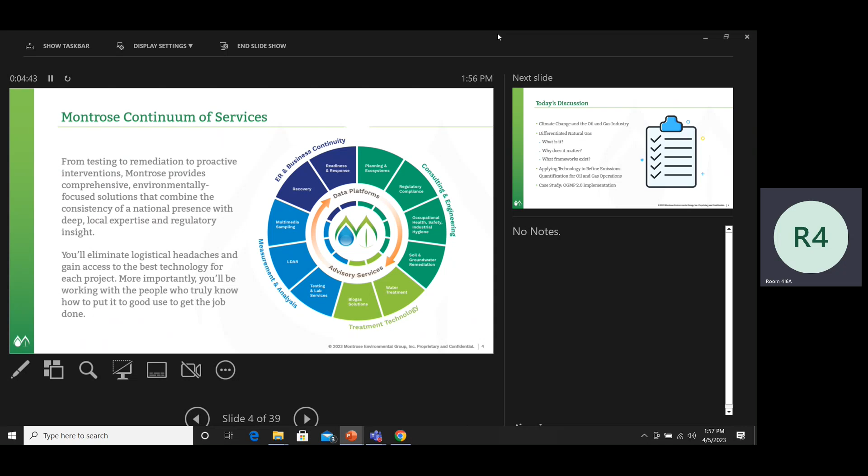So here's a rundown of what we're going to talk about today. We're going to start by talking briefly about climate change and the oil and gas industry and our place in that space. Moving on, we're going to talk about differentiated natural gas, what it is, why it matters, and how you can claim that you have it. Next, we're going to talk about technologies you can leverage to improve the accuracy of emissions quantifications from oil and gas operations. And finally, I'm going to wrap up with a case study about a client we've been working with extensively on their OGMP 2.0 implementation and kickoff and their measurement campaigns.

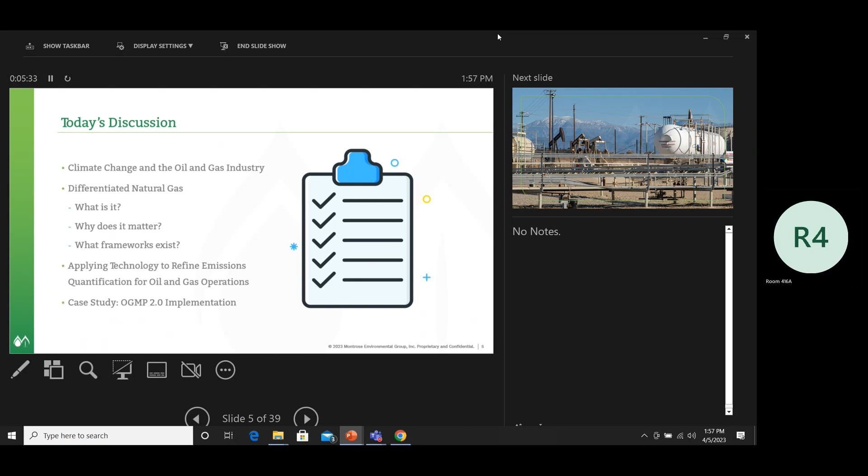Sorry. So setting the stage, climate change in the oil and gas industry. Methane gets a lot of attention. According to recent estimates, we can't cap out at a 1.5 degree Celsius temperature increase without a very significant decline in methane emissions, current estimates around 37%. Methane has a high global warming potential, 25 to 28-ish times higher than carbon dioxide. Because of that, it's thought that methane is responsible for about 30% of observed global warming to date.

Methane is also the primary component of natural gas. Therefore, if you look at a breakdown of reported methane emissions in 2021, the energy sector is a very large percentage, about 40. What's interesting is because methane is natural gas, it is the product, it's thought that you can avoid about 70% of current oil and gas methane emissions with technology that exists today. And because you're recovering product, you could probably avoid about 45% of that number at no additional cost to you.

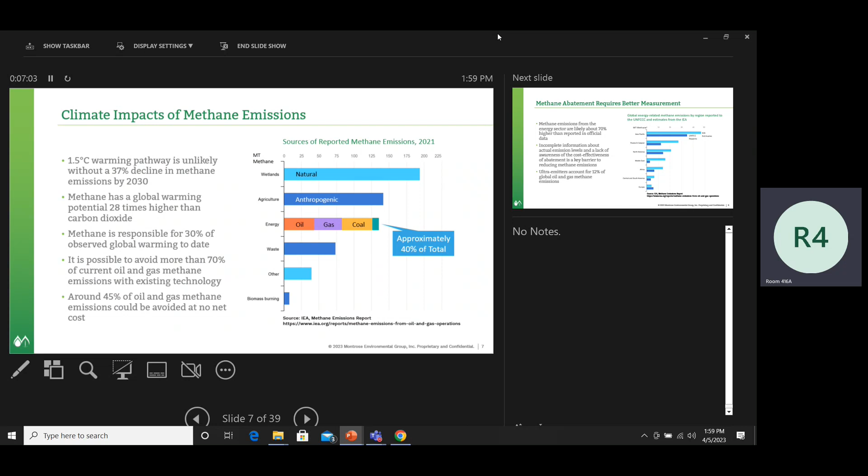Also interesting about methane emissions from the oil and gas industry is that, according to some estimates, actual emissions may be up to 70% higher than what's actually been reported. That's from information from flyovers and independent studies. What drives that? Incomplete information. If you don't have measurements, if you don't have real data, how do you know what you're emitting? And there's also a statement that ultra emitters are about 12% of the methane puzzle.

Okay, so all that together, what are the takeaways? One, methane emissions from oil and gas are under extreme scrutiny. We know that, we hear that, we see that every day. Methane is natural gas, and the energy sector results in methane emissions. Two, methane emissions reported from the oil and gas industry are incorrect. The status quo depended on emission factors. We know now that those emission factors are incorrect.

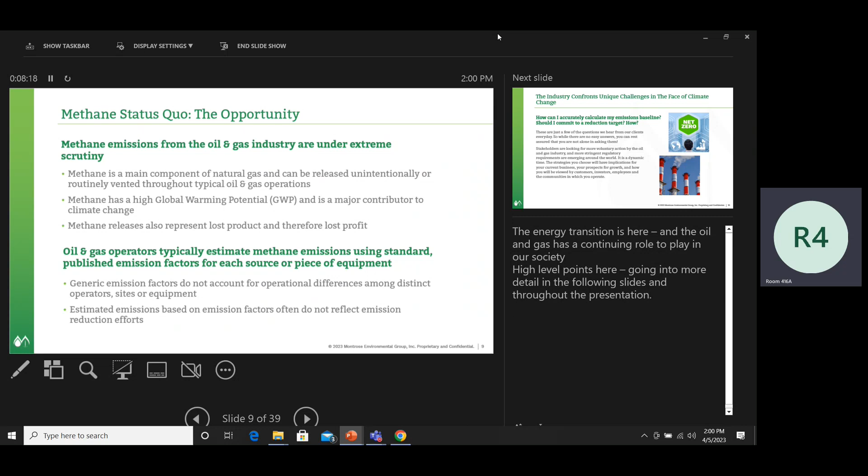So what do we do? We hear questions every day from people saying, okay, I hear this, I know this, but now what? How do I accurately estimate the emissions from my processes? But then what do I do next? I know what I'm emitting, and there's a lot of options. How do I know what's best for me? These are, like I said, questions that we hear every day. They're real, they're hard, but they're also interesting. They offer us incredible opportunity to learn more, to get creative, to apply technology, and to try to make a change.

That brings me to differentiated natural gas. So what is differentiated? It's actually pretty simple in terms of a definition. It's three things. The fossil fuel-based gas, natural gas. It is from production where methane emissions have been quantified, and there's been an effort to mitigate or reduce those levels. And then importantly, the third part of the definition of differentiated natural gas is that these estimates and this mitigation strategy have gone through a third party group. Those together make differentiated natural gas.

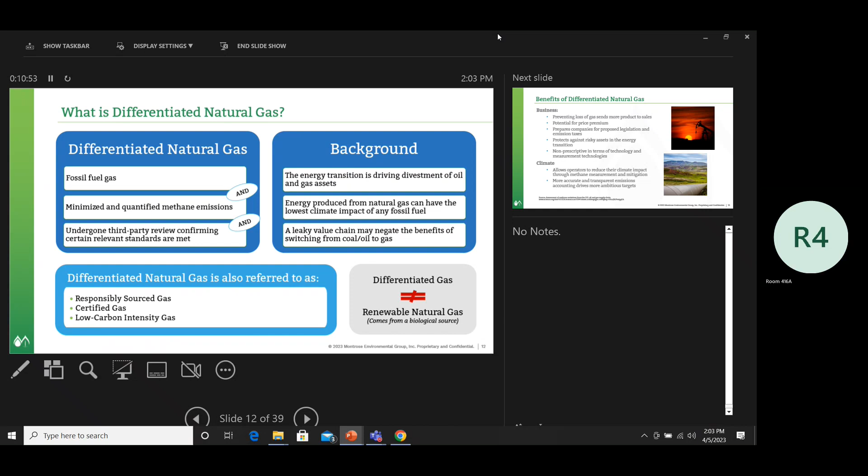There are benefits to pursuing differentiated natural gas. I separated these into two buckets because often people will gravitate towards one reason or the other, and they're both completely valid. The first are the business reasons. Preventing loss of methane to atmosphere keeps more product in your pipe. You're selling more, you're increasing your profit, it makes financial sense. There's also a potential for a price premium if you've got differentiated natural gas. If consumers are interested in that label and knowing that they're doing some part to reduce climate impact, they're often willing to pay a little bit more for it.

It may also prepare companies for proposed legislation and emission taxes that could be coming down the pipe. It protects against risky assets in the energy transition. We're seeing more and more focus from an investment perspective on ESG and carbon footprint, and if you understand where your emissions are, you can protect yourself financially. I also put in this business bucket that there are a lot of options within the differentiated natural gas program. When you don't have something very prescriptive, you have more power to choose what fits for you and your operations. You're not necessarily having to have huge impacts to your business.

From a climate perspective, differentiated natural gas programs allow operators to reduce their climate impacts through methane measurement and mitigation. And because they're very data driven, you're ending up with more transparent and accurate accounting, which allows you to prioritize your projects so that you're making the biggest real life impact.

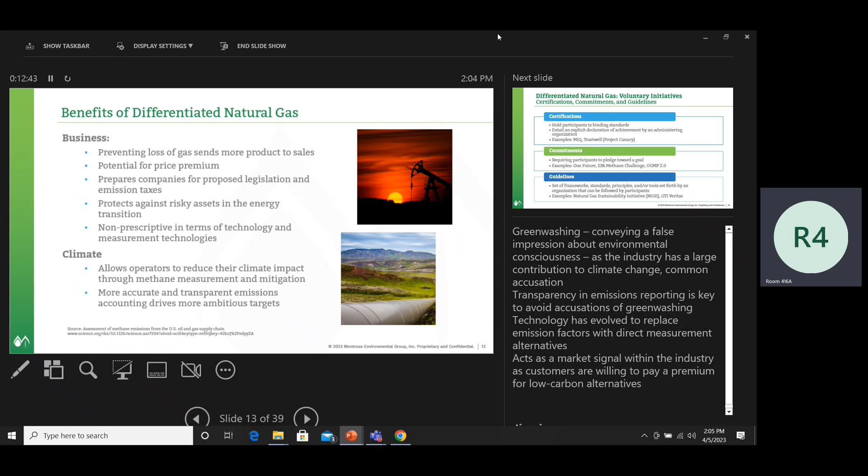The differentiated natural gas market in the United States especially is voluntary. It's voluntary, but it's gaining a lot of popularity. Because it's voluntary, not regulatory driven, we're seeing a lot of options in that space right now, right? Lots of people are coming forth with ideas on how to address this, how to change this. And there's a terminology that's important to understand.

The frameworks for differentiated natural gas really fall into three buckets or categories. The first are certifications. These are the most formal programs. They're going to hold participants to very binding prescriptive standards, and they require an explicit declaration of achievement by an administrating organization. These are going to be generally considered your more rigorous, your more difficult certifications to attain. Things like MIQ.

Just an aside, I did not list every single framework on this slide that exists. There's about 1 million, so I just called out a few of the big names here.

Commitments are a little bit more forward-looking in that participants are pledging to a goal that they're trying to achieve, and they are committing to steps to try to achieve that goal. But often getting any sort of achievement or designation under a commitment doesn't require that you actually meet the goal. Pledging to try. These are things like ONE Future, the EPA Methane Challenge, and OGMP 2.0.

All right. So most of those frameworks are going to require a first step of knowing where you are, right? I'm sure if you've gone to any talks today, you've heard some variation on the theme of you can't mitigate what you don't measure. I'm going to say the same thing today. It's important to know where you're starting to make goals for where you're ending up. And so I want to talk to you about how you can apply technology to refine your emission quantifications within oil and gas. Accurate measurements are the first step towards putting together that initial inventory. Once you have that initial inventory, you're going to know where your biggest potential for reductions and improvement might exist.

All right, so why should we measure? If you look back at historical oil and gas reporting, what you see looking at EPA mandatory reporting rule subpart W, there's a lot of relying on generic emission factors, an scf per minute per unit emission factor for something. We're automatically assuming that it's going to operate continuously or at full load for 8,760 hours per year. And you end up at a number that is maybe conservative, maybe not, maybe underestimating, maybe not. But you get a number, but it's not accurate. It's not tied to anything about your operation.

If instead you choose to explore both proven and emerging technologies, you can deploy measurement campaigns at your sites, collect data from your equipment based on your processes, and develop a database of emission factors that you can then leverage and apply across your organization to end up at an emissions estimate that is transparent. You can publish your methodologies for your measurements, for your sampling, for your assumptions, and it should also be more accurate because it's based on your operations. And so I argue firmly that this is where we want to end up. That if you're starting a sustainability journey, if you're anywhere on this path, you need to measure what you're doing to figure out where you're going.

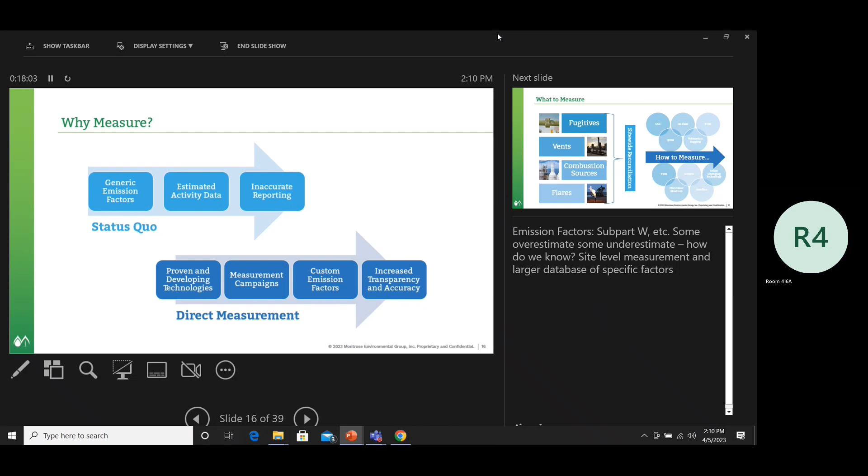Within the oil and gas world, we basically see 4 types of emission sources where folks are focusing on bottom-up or emission source specific measurement. Those categories are fugitives, so those are unintentional leaks from things like your piping components, your valves, your flanges, your connectors, stuff like that. You see emissions from vents, things like your glycol dehydrators; your pneumatic devices also qualify as vents. Methane slip emissions from your combustion sources, like your compressors or your turbines, your engines. And then flares, your control devices, understanding what the greenhouse gas impact is of those sources.

Altogether, you can also try to get an idea of what your site as a whole is emitting through measurement of site-wide emissions through fence line or aerial sort of measurement that you can then use to do what we call site-wide reconciliation, basically see if your site-wide numbers match the sum of your sources, and really drive at that approach to understand where you are today.

On the right-hand side here, how do you measure? And I think I put 10 circles there, and there's a lot more than that.

I tell my kids all the time that we live in the future. It's a really exciting time right now. Technology is changing, and it's changing fast. What we have today is not the same as yesterday or what we're going to have. And so there are so many technologies out there that you can apply to your site to try to get an idea of what's happening at these sources, what's happening at your site site-wide. Where are you? So you can decide where you're going.

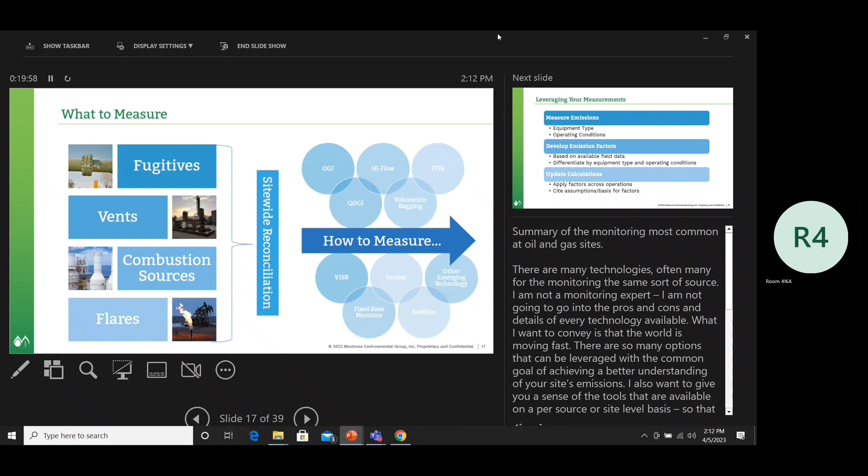This is also really important. One thing that I love about the team that I work on is that we're working with the guys who are taking the measurements in the field, and we're figuring out how to take that data and how to leverage it. How do we use it? How do we interpret it? We work with them to figure out the bounds of our measurement campaign. What sources are we going to test? How many of them? What's a statistically defensible way to put together a testing strategy to ensure that we're testing and getting data on a representative number of sources?

Once that testing has occurred, we develop emission factors based on the data that's collected in the field and field data, importantly, that can be collected from the site so that they can use those emission factors moving forward. Can we tie an emission factor to fuel flow, to something else tangible, so we can try to use that factor in a way that is accurate and defensible?

And then from there, once you have your emission factors, you need to apply them. You need to update your calculation tools, integrate them into your platforms so that you can leverage your measurements across your organization and end up at an emissions estimate that is accurate.

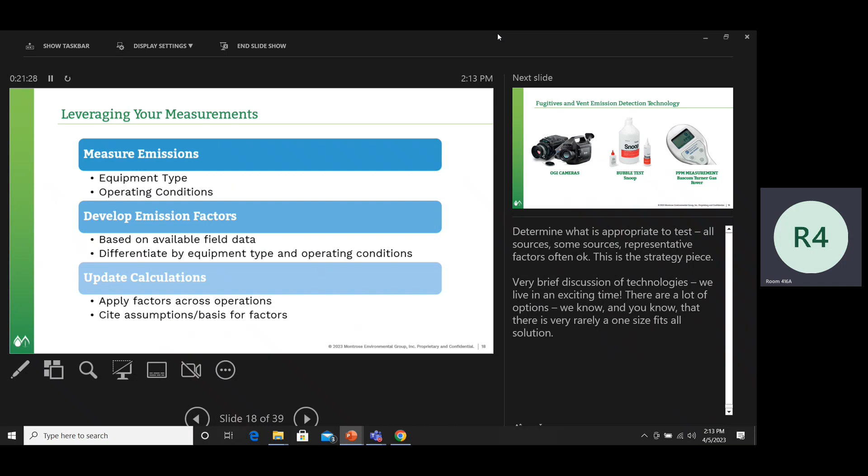All right, so these next slides, I think I'm going to fly through. I'm not intending to spend a lot of time on them, but I wanted to give you just a small taste of some of the technology that exists and which bin you might put it into for sources that you could use it to measure. There are measurement experts in the room. If you have questions, you can talk to them. I'm just going to do a high-level rundown.

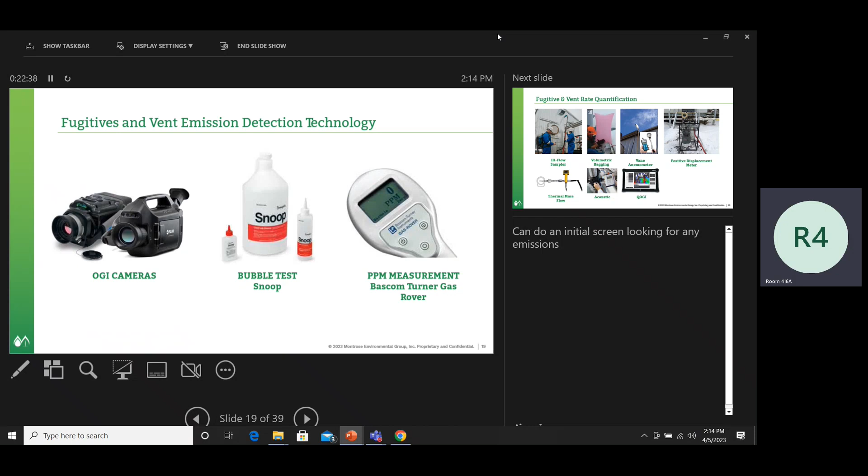Starting with fugitives and vent emission detection technology. This is by and large the most numerous kind of emission source that you're going to have at an oil and gas site, right? You're going to have thousands of piping components, so on and so forth. So the most efficient way to get at this is really using a two-step system, doing first a screen to identify whether emissions exist from a particular component or particular source at all, using a technology like optical gas imaging with your FLIR, your OpGal, or potentially using a simple handheld gas monitor or something like Snoop if you're just trying to track down a leak that you hear.

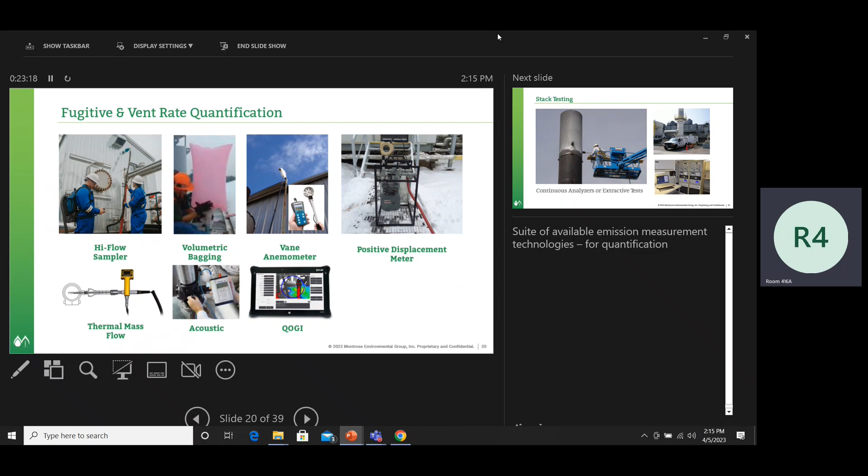If you've got combustion sources, you're going to need to look at stack testing. A term that we're hearing a lot and that people are really trying to get a handle on is methane slip. That is uncombusted methane that's coming from your stack of a combustion device. The best way, the most reliable way that people are getting at that number, at least as a direct measurement, is going to be through FTIR stack testing, which is the technology that was in here right before I finished up.

It's important to note that, at least what I'm seeing, this methane slip question is getting a lot of questions about: is there something we can do besides FTIR? Is there a different way to apply a different technology? And so that's something that we have been working on, but the most common is FTIR.

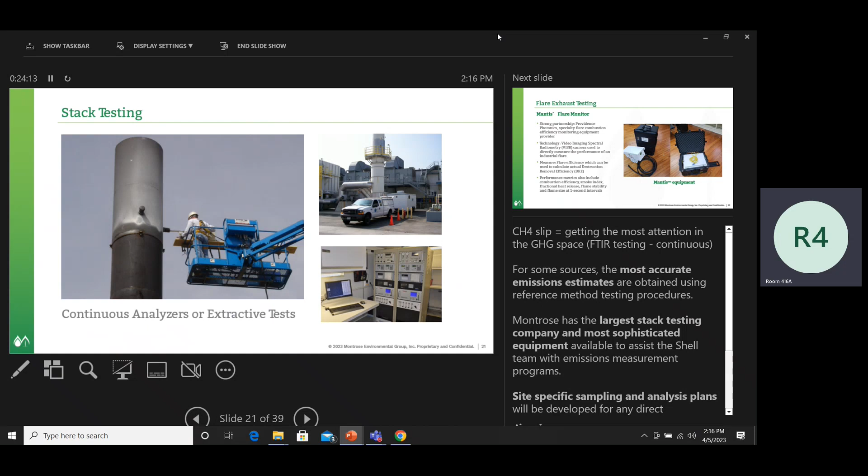Flares. We've got a strong partnership with Providence Photonics, who's also here at this conference, where we've been working with our clients to deploy their Mantis technology to get a quantitative measurement of how efficient the combustion is within their flare, to get an actual understanding of the DRE, the destruction removal efficiency of the flare. The standard in the industry is to assume 98% flat. We're seeing anything from 92% to 99%.

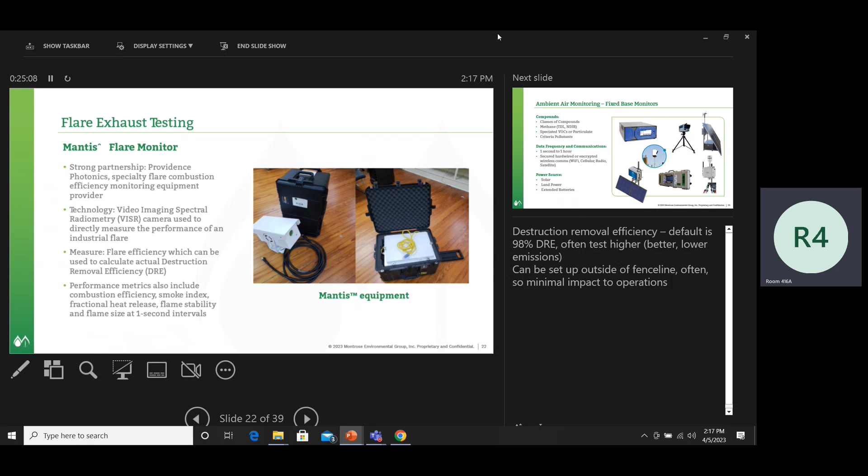And with the flow rates that are sent to a flare, that can make a world of difference in your actual greenhouse gas quantification. So this is important, and I think it's one of my favorite ones to learn a little bit more about and to see videos of it in action. All right, so those are level measurements.

I mentioned on that initial slide into this section that there's top-down and bottom-up measurements, or source-specific versus site-wide. A lot of the times, as folks are feeling like they have a handle on their source-specific calculations, they're moving into site-wide measurements that inform this reconciliation, right? To true up their emissions estimates and to argue that they got it right.

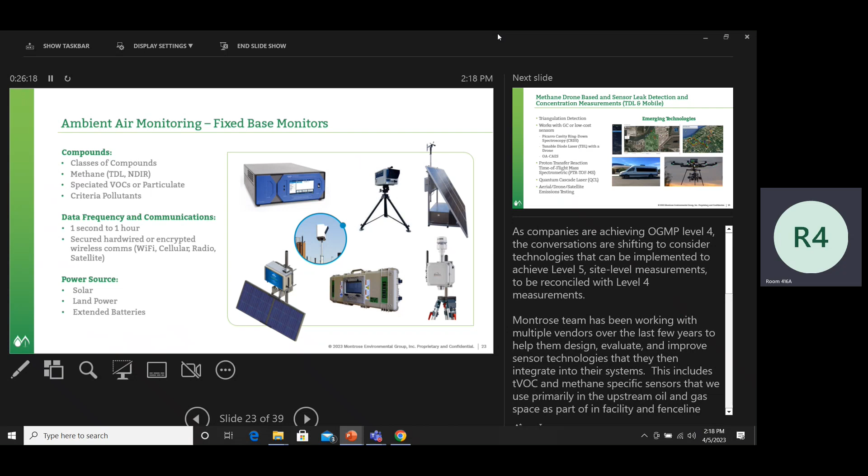One way that you can start to collect data on site-wide measurements is using fixed sensors. As an aside, you can also use this to get hyperlocal information if you position it correctly by the exact right source. But within my world, I'm seeing it more from a site-wide perspective. And these are technologies that deploy at your fence line, essentially, to measure your site-wide emissions. There are a lot of different options for technologies, the sensors inside, how they're powered, how they communicate with your systems, and so on and so forth.

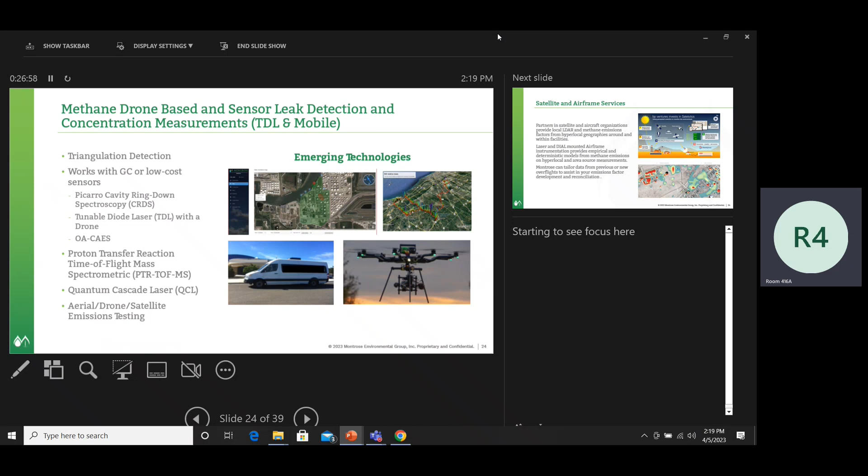Some of the emerging technologies are really cool. The idea of using a drone or a satellite or a van or a laser set up on your perimeters, I think it's fascinating. And the technologies exist. There are partners to Montrose and people within Montrose who can speak at length about who we're working with and who's doing this. But it's another option that you can deploy to start to get an idea of what your site-wide emissions look like. Here's one slide on satellite and aircraft services as well.

What I want the takeaway for this section to be is an understanding that the world is big. Nothing is going to work for every site. There's not something we can point to and say, everybody should do this. And even within one operator, you can't say that. You can't say this is going to work. You can't deploy drones everywhere in the world. It's not safe. You can't have fence line monitors if environmental conditions aren't amenable to it.

So you need to be flexible. You need to stay aware of what's out there and understand the pros and the cons of a technology before choosing what you proceed with. But the common goal here is all the same. It's all to understand where you are now so you can prioritize where you're going.

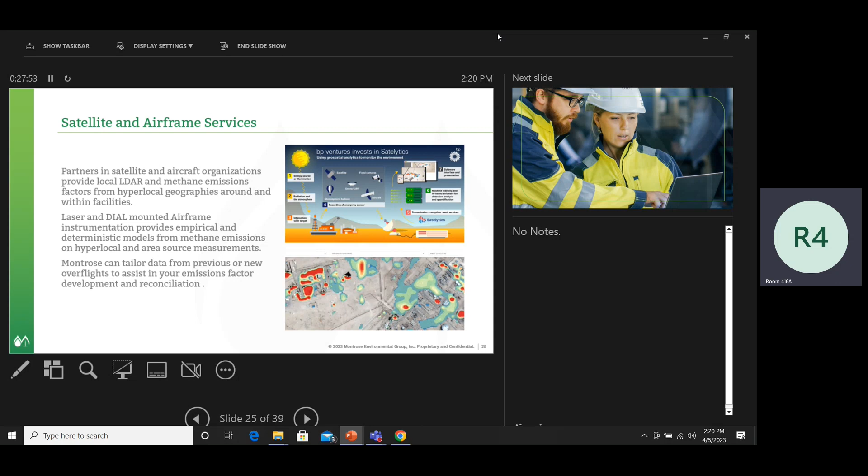I'm going to finish up by talking about one really exciting project that we've been working on for the last 9 to 12 months, which is assisting a multinational oil and gas operator with their OGMP 2.0 measurement campaigns and implementation.

Briefly, OGMP 2.0 is a differentiated natural gas commitment. To join OGMP 2.0, there's not any sort of fee. What you do is you sign a memorandum of understanding with the United Nations Environment Program committing to take part in this program. You commit to a goal for achieving an industry-driven methane intensity, and you commit to deploying accurate and transparent measurement technologies to support your assertion that you're moving towards that goal.

This program is actually pretty big. It includes 35% of the global oil and gas production now, 70% of the LNG flows, 25% of global natural gas transmission and distribution pipelines, and then 10% of global storage. There's obviously room to grow, but a lot of the really big oil and gas players have committed to the program.

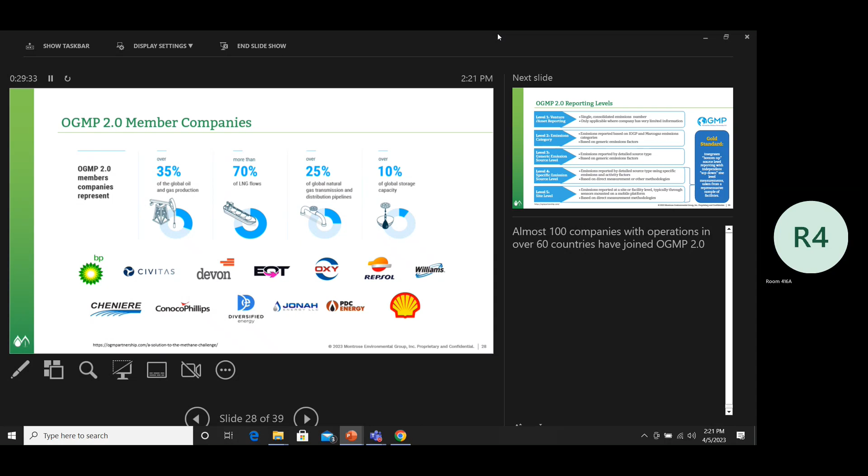The way that this is structured is that OGMP has 5 different reporting levels, depending on the specificity of the emission calculations that you are using to develop your portfolio methane emission estimates. Going from 1 to 4, really, they're moving from the most generic site-wide assumptions into specific emission source level emission factors. And then level 5 is that site level reconciliation that I described previously. Level 4 is where we're seeing a lot of people trying to get it right.

In OGMP 2.0, you put together a baseline emissions inventory of where your emissions are now, and then you commit to achieving level 4 quantification on those emission sources that are considered to be material, or make up about 95% of your footprint. To achieve level 4, you are basically sampling what they have defined as a statistically significant number of your sources in your operating scenarios, and then deploying those measurement results to update your emissions inventory calculations.

In order to achieve the OGMP gold standard, you have 3 years after you've made that initial pledge. You basically are awarded the gold standard every year. You can lose it. The first year that you're in the program, you can get the gold standard if you put together an implementation plan that outlines a credible strategy for achieving level 4, level 5. And throughout your participation in the program, you should be achieving that level of measurement accuracy. So really your gold standard designation is tied to how well you're measuring and how well you're planning to continue measuring in the future.

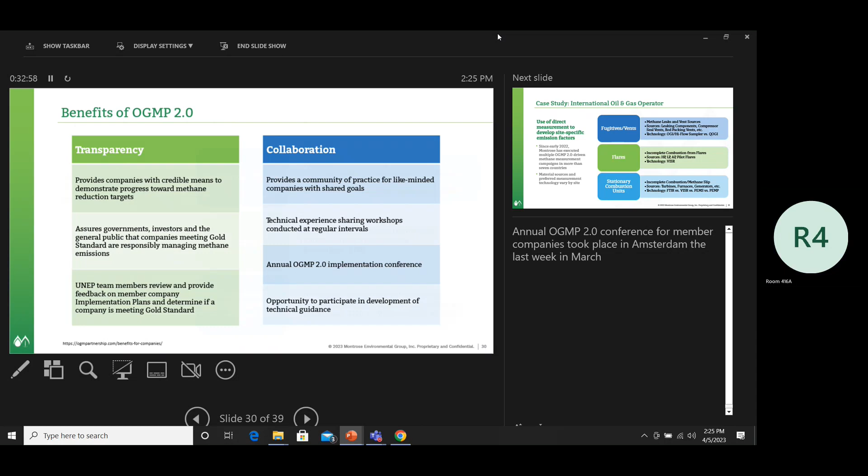Another thing that I think is really great about OGMP is that it is not prescriptive in your technology. This operator that we've been working with, we have been working with them in 5 countries, I think. And each country has been a little bit different in terms of our measurement strategies and the technologies that we've been deploying. By and large, the sources that we've been testing are the same. We're doing fugitive campaigns and stack campaigns and flare campaigns.

Depending on what their emissions footprint looks like, materiality is dictating which sources we test. The operations are dictating: do we need to do a turbine stack test in 2 or 3 loads or just one? How are they actually running their operation? How do we need to adjust our sampling strategy if this is an offshore operation versus an onshore operation? What are technologies that we can explore if their combustion stacks aren't all outfitted for stack testing? These are just some of the questions that we've worked with this operator to address.

Another interesting question that we've been working with this operator on is how to quantify and get an actual number for emissions from their pneumatics and from their fugitive components, because they had purchased 10 QOGIs, and now we're trying to understand how the head-to-head comparisons of QOGI compare to high flow, and might there be a situation where you can use one technology versus the other?

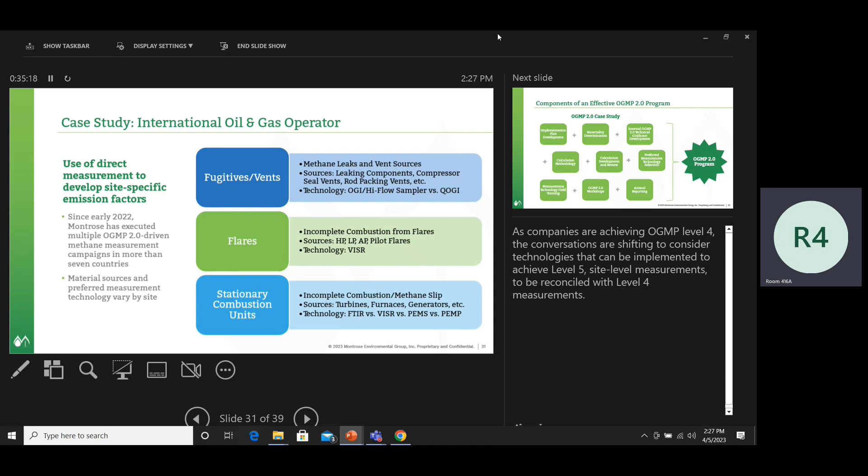My last slide, which I think is good, so we're right at time. But my last takeaway point here is that I know that I've focused a lot on emissions quantification and understanding baseline emissions and measurement technologies. But that's not all it is. There's a lot more components to having a successful OGMP or any other sustainability program within your organization.

There's a lot that comes together into a successful sustainability program. But that foundation, that first step is understanding where you are. And I firmly believe that the technology exists to answer that question.

I have a question for you. I'm a little bit confused with the differentiated natural gas and a responsibly sourced gas. So for example, if you are a natural gas producer in California subject to CARB, I think that will automatically make you a differentiated natural gas, right? But I thought a responsibly sourced gas needs a certification, like Project Canary or something like that.